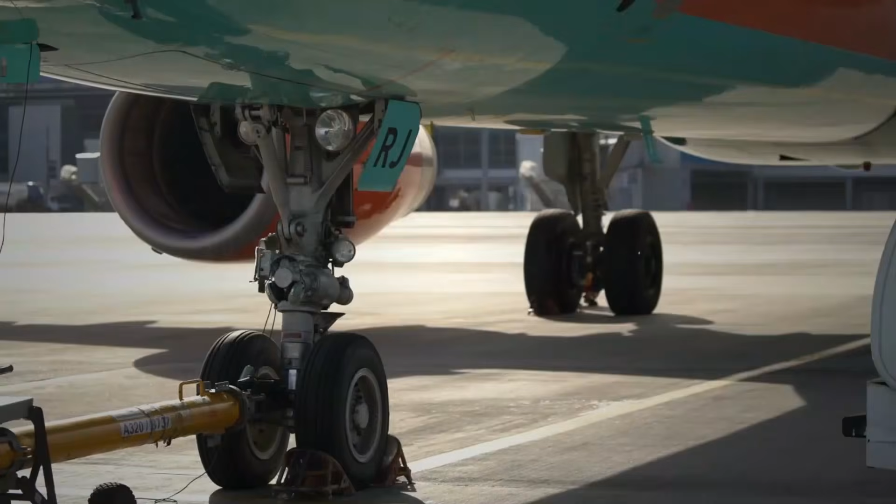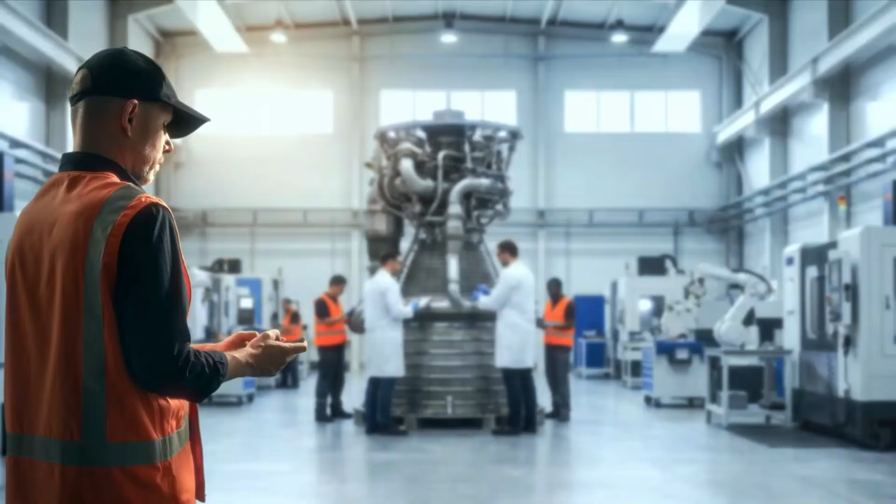These weren't mechanical failures in the traditional sense. The planes were grounded because the engines fitted to them had been recalled, or because the replacement engines needed to get them back in the air were waiting in a supply chain that had effectively stopped moving. Pratt & Whitney issued a recall of its GTF geared turbofan engine in 2023, affecting over 1,000 aircraft worldwide. The powder metal contamination that triggered the recall required engines to be removed, inspected, and in many cases replaced, a process that takes months per engine and requires shop capacity that the maintenance industry does not have.

Here's why a problem inside two engine manufacturers grounded more aircraft than any crisis in commercial aviation history, outside of a regulatory shutdown. To understand this, start with one basic structural fact: the jet engines that power the world's commercial fleet are not built by a competitive market. They are built by a duopoly. And when both members of that duopoly break down simultaneously, there is nowhere else the industry can turn.

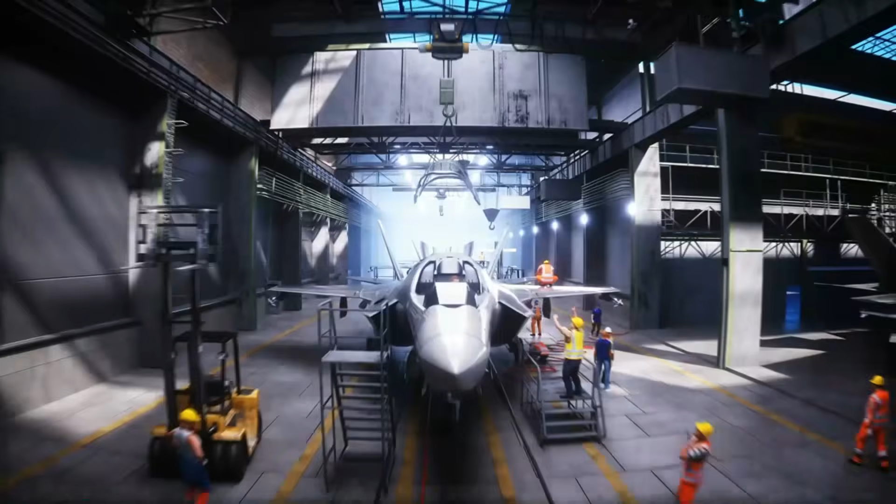CFM International, a 50-50 joint venture between GE Aerospace and Safran Aircraft Engines, and Pratt & Whitney, a division of RTX Corporation, together power approximately 80% of the world's narrow-body commercial fleet. CFM's LEAP engine powers the Airbus A320neo family and the Boeing 737 MAX, the two best-selling narrow-body aircraft in aviation history. Pratt & Whitney's GTF engine powers the A320neo family as the alternative engine option. Between these two programs, virtually every new narrow-body aircraft delivered since 2016 flies on an engine built by one of two companies. Both companies entered the post-COVID recovery period with supply chains damaged by pandemic-era manufacturing shutdowns, raw material shortages, and the loss of skilled labor that doesn't rebuild overnight.

CFM fell behind on LEAP deliveries, leaving new Airbus and Boeing aircraft without engines at the point of delivery. Pratt & Whitney discovered the powder metal contamination issue in existing GTF engines, triggering a recall that pulled serviceable engines out of the fleet at the same moment the fleet needed them most.

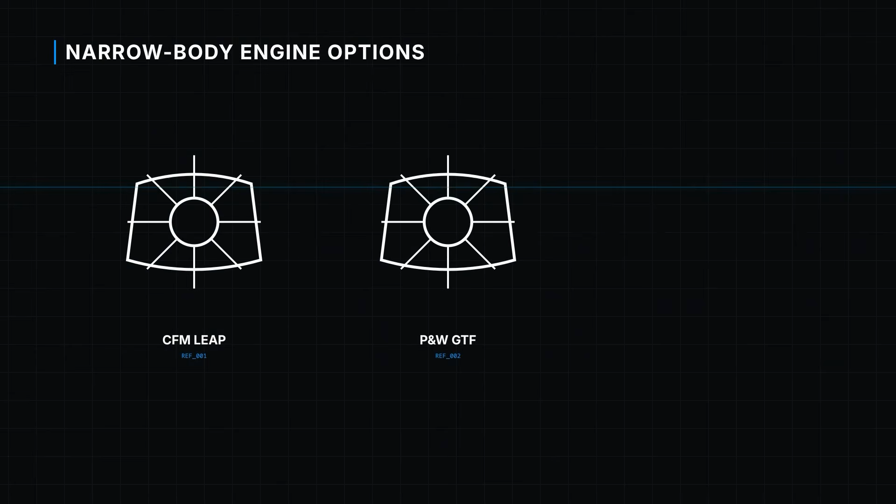An airline buying a new narrow-body aircraft chooses between the CFM LEAP and the Pratt & Whitney GTF. There is no third engine option. When both suppliers fail simultaneously, the airline has no alternative to turn to and no contractual mechanism to compel either manufacturer to accelerate. The cost of what happens when a duopoly breaks is not paid by the companies that broke it. It is paid layer by layer by the airlines, the passengers, and the leasing companies sitting on assets that cannot fly.

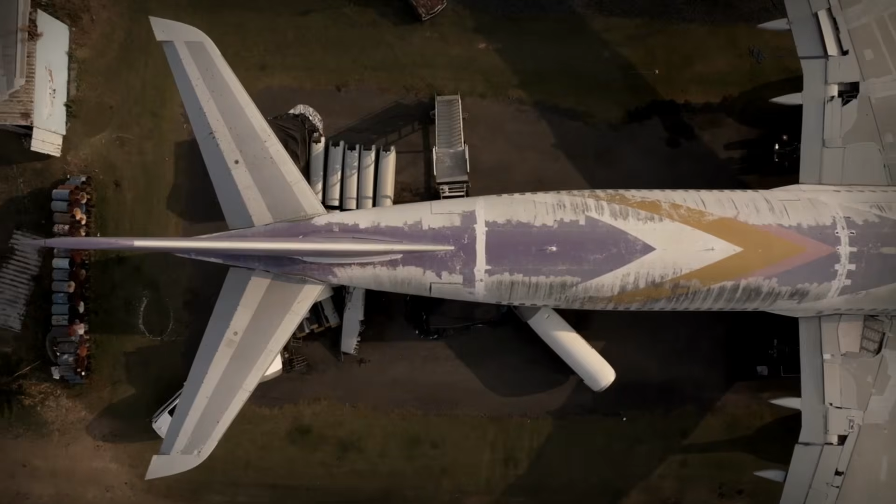So what did the engine shortage actually cost the airlines absorbing it? It starts with wet leasing. Airlines whose aircraft are grounded must source replacement capacity from other operators through wet lease agreements, arrangements that include the aircraft, crew, maintenance, and insurance bundled together. Wet lease rates for narrow-body aircraft ran between $150,000 and $250,000 per aircraft per month during the peak shortage period of 2023 and 2024. An airline managing 10 grounded aircraft faces a wet lease bill of $1.5 to $2.5 million per month just to maintain its schedule, on capacity it already owns and has already paid for.

Then there is revenue dilution. An airline that reduces its schedule by 10% due to grounded aircraft loses that revenue permanently. Unlike a factory that can run extra shifts to recover lost output, a missed flight cannot be rescheduled and resold. Airlines including IndiGo, Wizz Air, and Go First publicly disclosed material revenue impacts from GTF groundings, revenue that no compensation mechanism from Pratt & Whitney was structured to replace.

Then there is passenger compensation liability. EU regulations and increasingly global passenger rights frameworks require airlines to compensate passengers for cancellations regardless of cause. GTF-related cancellations generated compensation liability that airlines absorbed directly, with no contractual right of recovery from the engine manufacturer whose recall caused the cancellation.

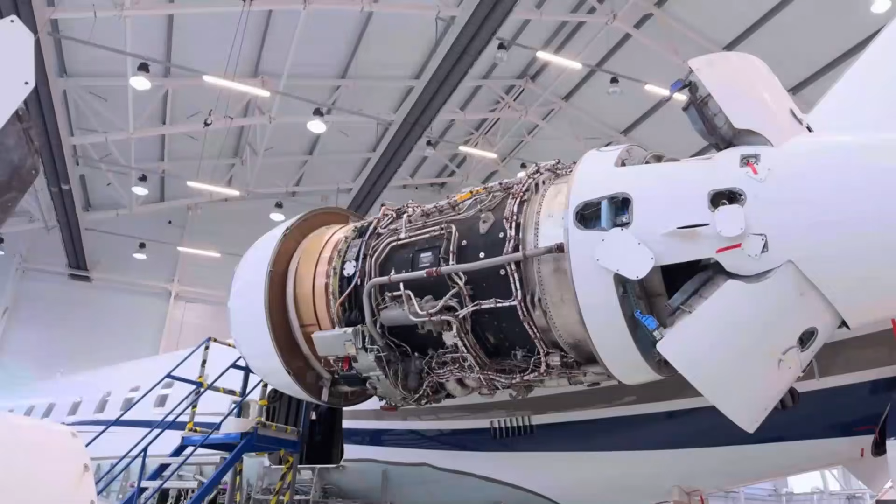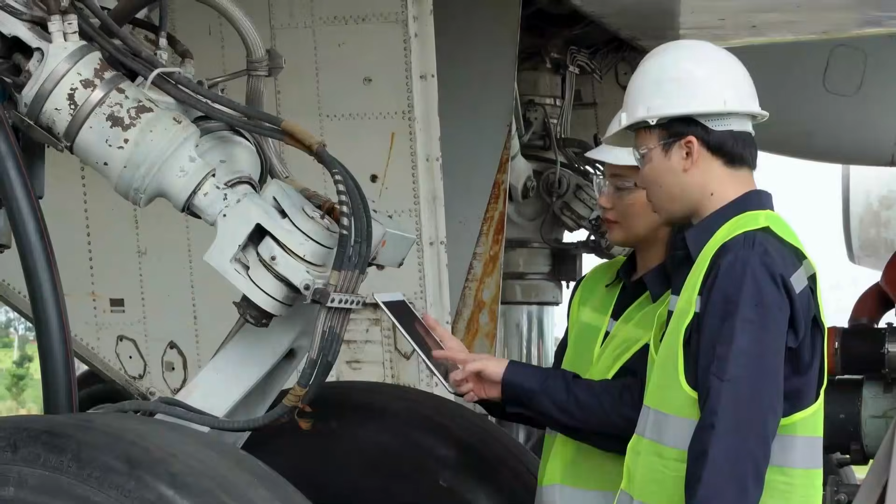But the cost that compounds across the entire fleet is maintenance queue displacement. Engines removed for GTF inspection occupied shop capacity that would otherwise have been used for routine overhaul of other aircraft. Every GTF inspection that entered the queue displaced a scheduled maintenance visit and created a secondary wave of airworthiness compliance risk across fleets that had nothing to do with the original recall. The combined cost of wet leasing, revenue dilution, passenger compensation, and maintenance displacement across affected airlines ran into the billions of dollars globally through 2023 and 2024.

But the cost stack only explains how much the shortage cost. It doesn't explain why the shortage was structurally inevitable. And that answer is in the manufacturing contracts that nobody outside the industry reads.

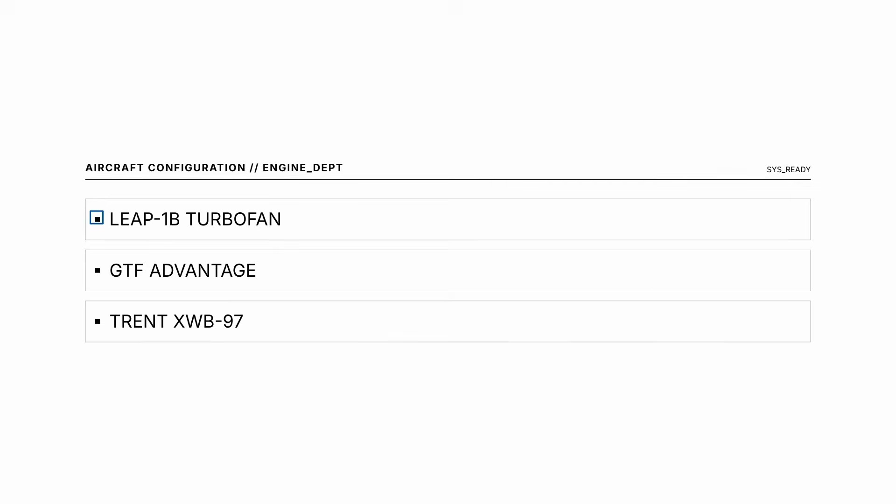So if the shortage cost the industry billions, why were airlines locked into a supply chain with no alternative when it broke? Because the engine selection an airline makes when ordering a new aircraft cannot be changed for the life of that aircraft. An Airbus A320neo, certified to fly with CFM LEAP engines, cannot be retrofitted with Pratt & Whitney GTF engines.

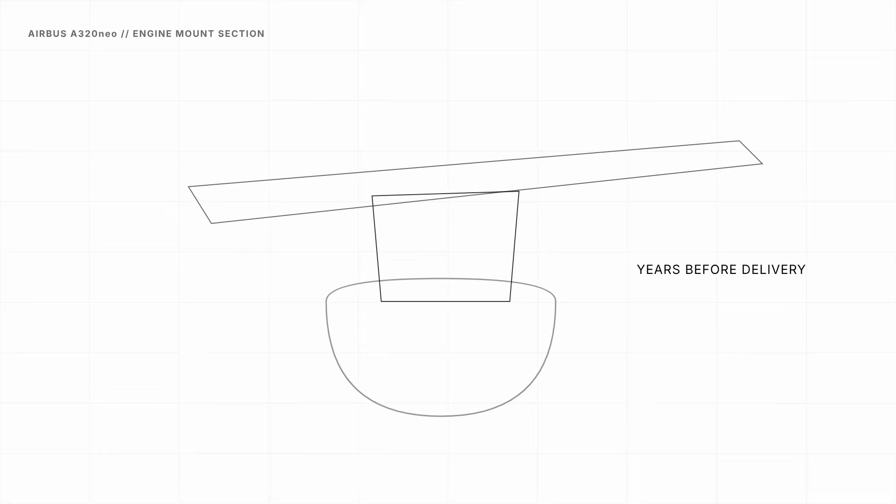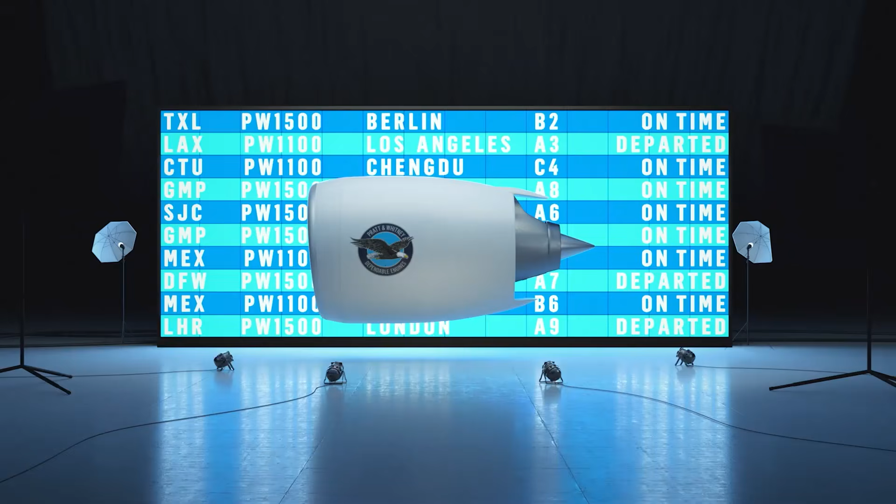The engine selection is made at the aircraft order stage, years before delivery, and is embedded in the aircraft's type certificate. An airline that ordered GTF-powered A320neos in 2015 or 2016 committed to Pratt & Whitney for the entire 25 to 30-year operational life of those aircraft, with no exit option, regardless of what happened to the manufacturer's supply chain.

Go First, an Indian low-cost carrier, filed for bankruptcy in 2023, citing Pratt & Whitney engine shortages as a primary cause. At the time of filing, 54 of the airline's aircraft were grounded. At $1 million to $1.5 million in lost monthly revenue per grounded aircraft, Go First was absorbing between $54 and $81 million in monthly revenue loss, sustained over multiple months, with no contractual mechanism to recover it from the manufacturer whose engines had grounded its fleet.

If two companies control every engine on every narrow-body aircraft flying today, the question isn't how the shortage happened. The question is why the system was built this way, and who benefits from it staying that way. The math doesn't make a suggestion, it gives an order.

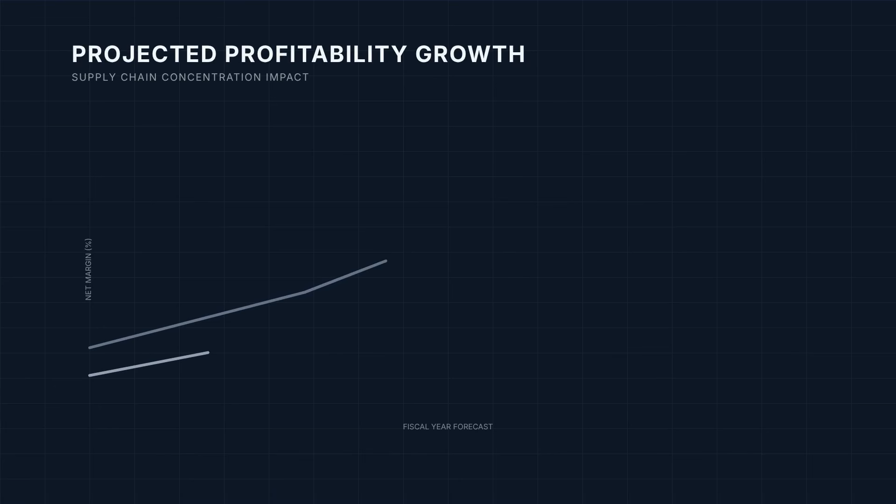Here's what nobody talks about. The engine shortage that grounded hundreds of aircraft did not cost CFM International or Pratt & Whitney their market position. It cost the airlines. And the same supply chain concentration that made the shortage systemic is also the mechanism that makes both companies extraordinarily profitable in the years that follow it.

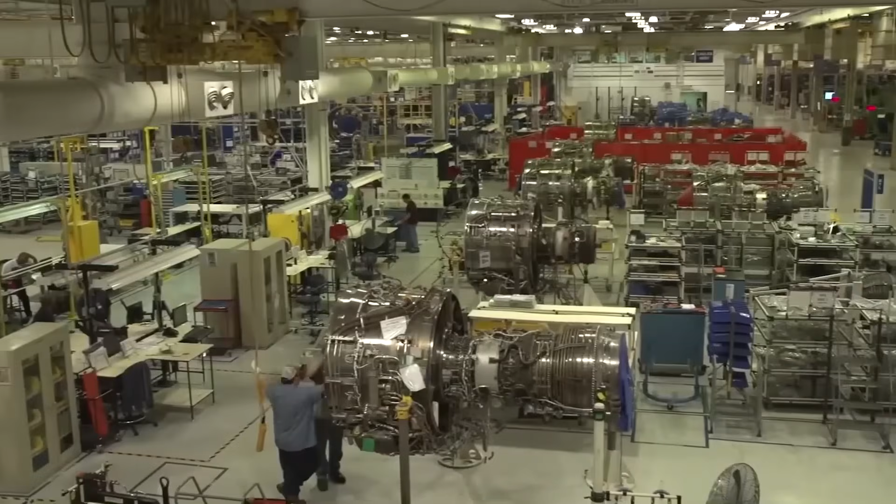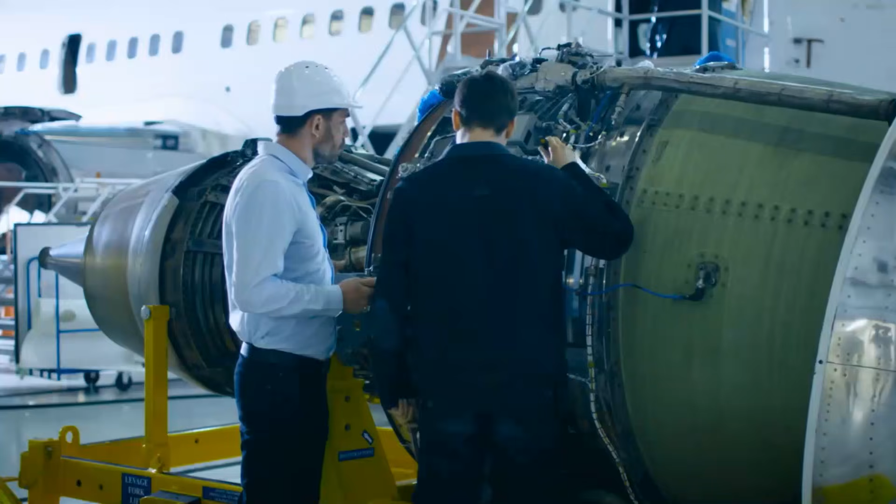Jet engines are sold at or near cost at the point of manufacture. The margin is in the aftermarket. Engine maintenance, repair, and overhaul, the work required to keep a certified engine airworthy across its 25 to 30-year service life, generates the majority of the lifetime revenue from any engine program. Exclusive certification means the airline cannot take its engine to an independent shop. It must use manufacturer-approved facilities at manufacturer-set labor rates using manufacturer-supplied parts.

The global aircraft engine MRO market was valued at approximately $85 billion in 2023. CFM and Pratt & Whitney's authorized networks capture a disproportionate share of that through the same exclusive certification requirements that locked airlines into a broken supply chain. The shortage that grounded hundreds of aircraft simultaneously created a maintenance backlog that aftermarket service providers, majority owned or licensed by the same two manufacturers, are now billing at premium rates to clear.

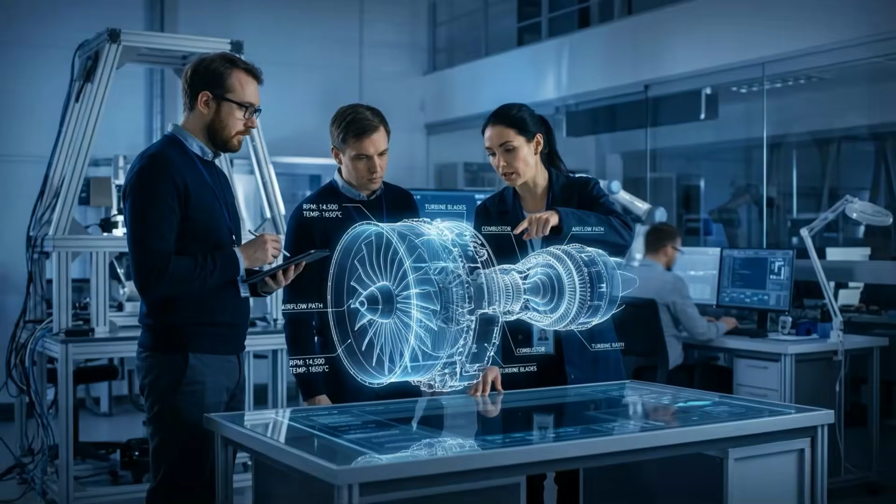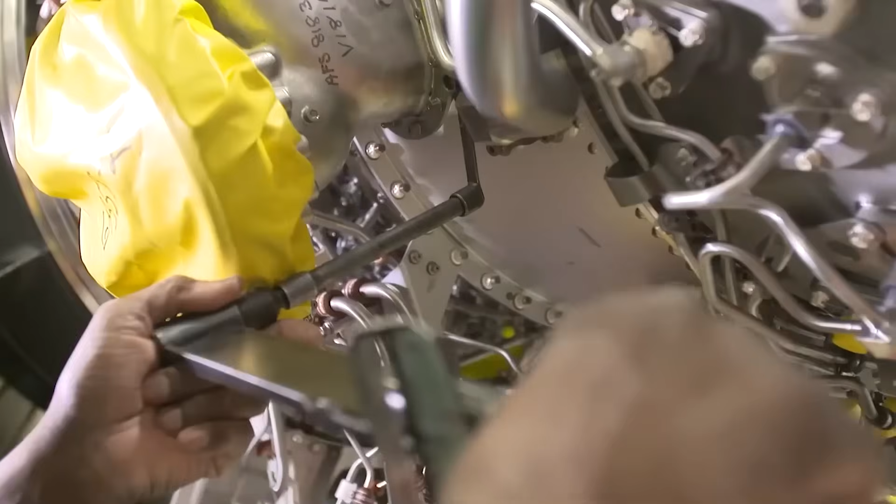There is no financial incentive for either company to support reforms that would allow independent MRO providers to service their engines without authorization. Doing so would directly reduce the aftermarket revenue that funds the R&D cost of the next engine generation. The concentration that produced the shortage hasn't been reduced. It has been locked in further by the next generation of engine contracts, and the airlines that were grounded in 2023 have signed those contracts anyway.

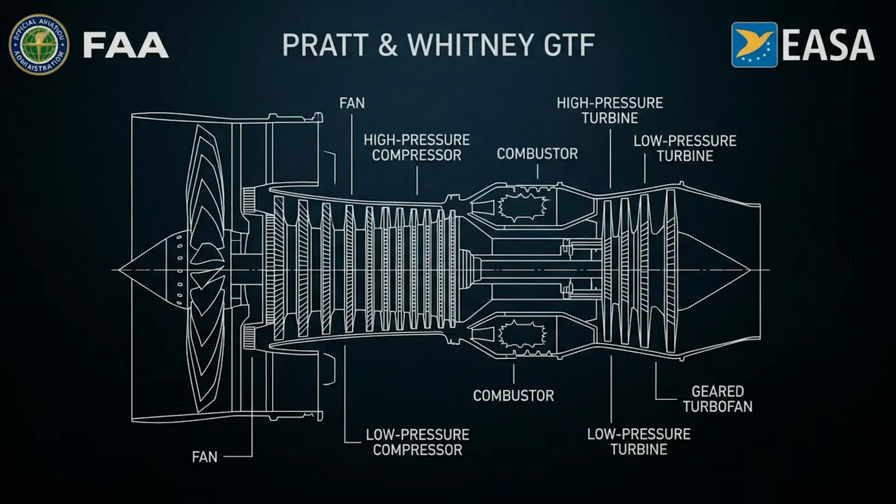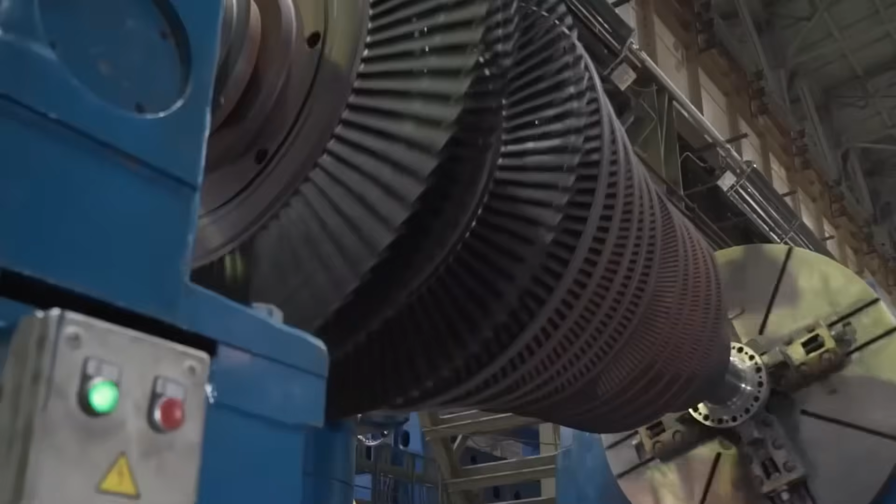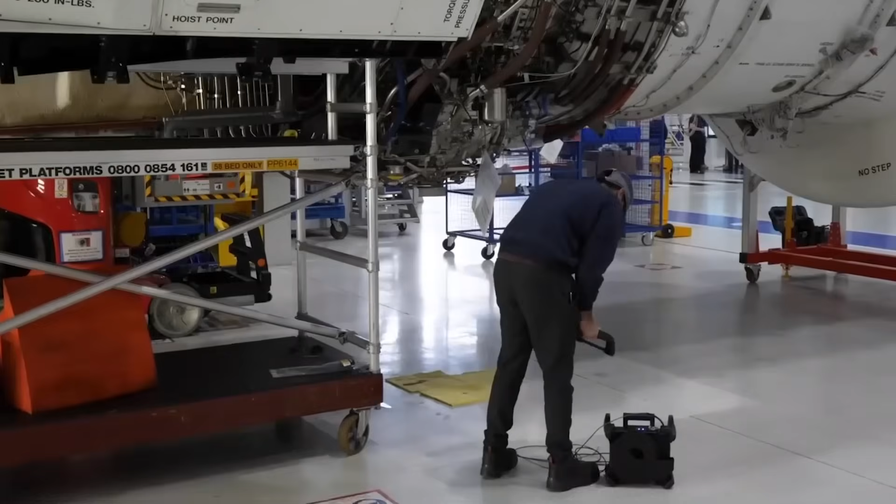There have been attempts to address this. The US Federal Aviation Administration and the European Union Aviation Safety Agency both launched investigations into the Pratt & Whitney GTF powder metal contamination issue in 2023. The investigations produced an accelerated inspection mandate and a timeline for engine removal and replacement that Pratt & Whitney has struggled to meet. What neither investigation addressed is the structural concentration of the engine manufacturing market itself, or the exclusive certification framework that turned a manufacturer's quality control failure into a global aviation capacity crisis.

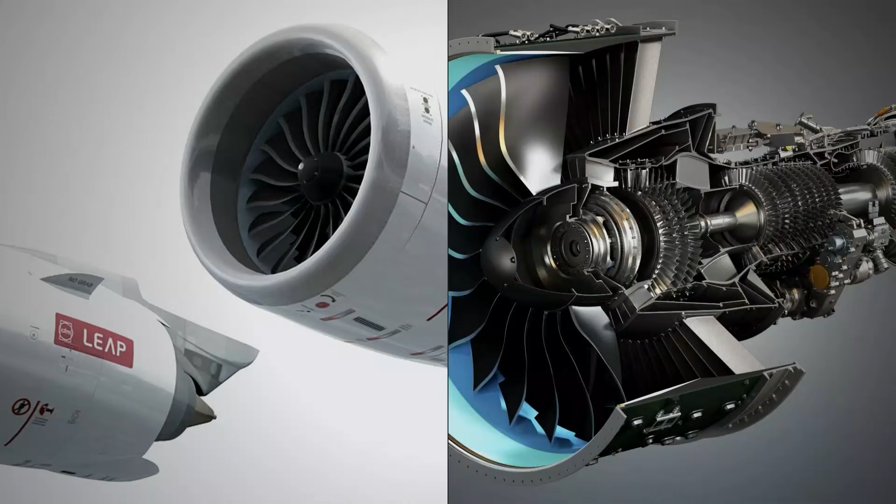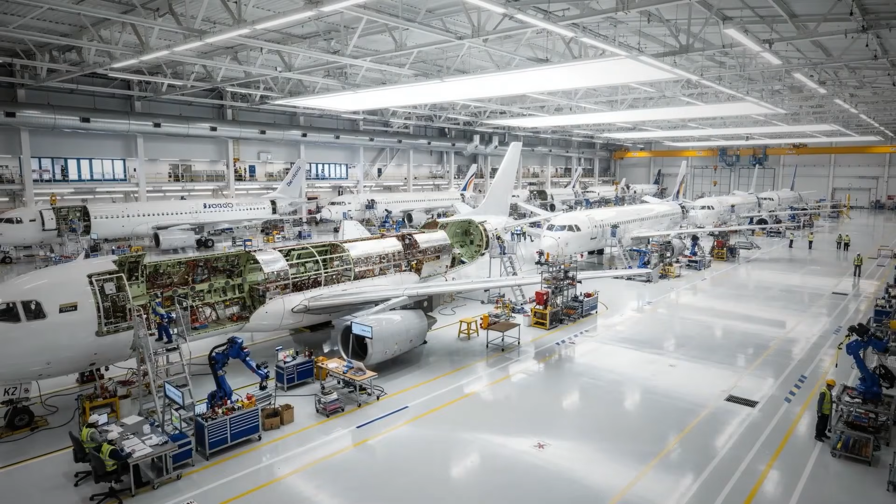The barriers to entry in jet engine manufacturing are not regulatory choices, they are economic realities. Developing a certified commercial jet engine takes decades and costs billions of dollars. No new entrant has launched a narrow-body jet engine program since the GTF and LEAP were developed in the 2000s. When China's COMAC launched its C919 narrow-body aircraft, the most significant new commercial aircraft program outside Boeing and Airbus in a generation, it equipped the aircraft with CFM LEAP engines. Even a state-backed aviation program with unlimited development budget could not produce a competitive alternative engine in time for its first commercial aircraft.

So the strange truth remains. The world ran short of serviceable aircraft, not because it ran short of planes, but because two companies build almost every engine that makes them fly. And when both stumbled at the same moment, there was nothing behind them.

The airline isn't turning away passengers because it wants to. It's being rational inside a supply chain designed around concentration so extreme that when two companies stumble, the entire global fleet feels it. That's not an aviation problem. That pattern shows up in every industry you've never thought to look at.